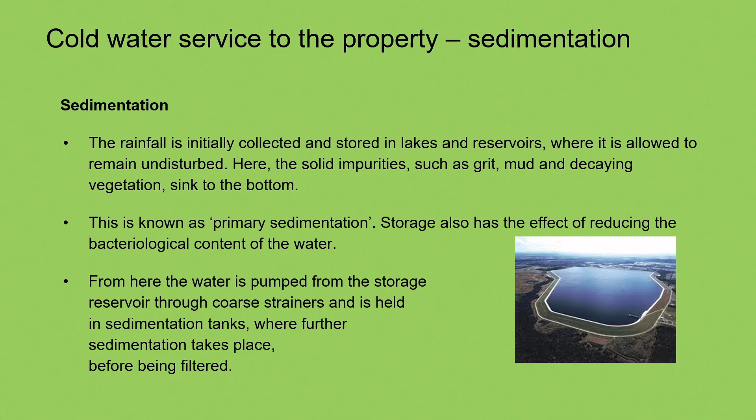Coagulation. Why is coagulation important in water treatment? So again, if you think you know the answer, put them in the comments below. If you're feeling shy though, write down on a bit of paper what you think that answer is. I warn you, it's quite a long one. Right, so why is coagulation important in water treatment?

So the answer would be coagulation does not guarantee safe drinking water, but it's still an essential part of the water treatment process. It removes suspended substances that make the water difficult to properly treat with a disinfectant and means that less chlorine can be added to disinfect the water. So it's making it safer basically.

So we try and get as much debris or sediment out of it as we can. So we use this treatment to get that out of the water, which means then we use less chlorine, which also means it doesn't cost as much to the water undertaker to treat.

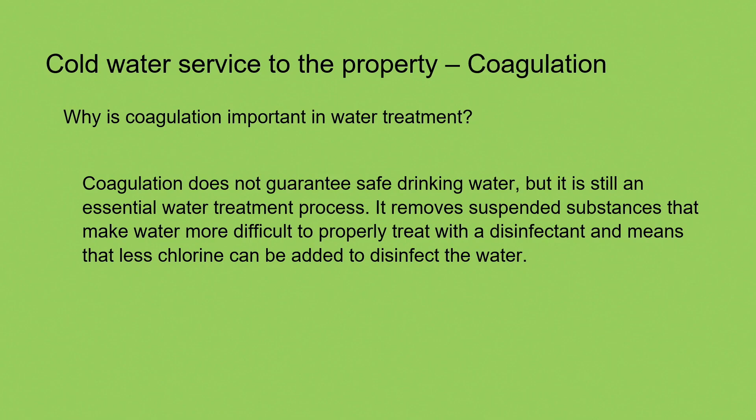Coagulation. Right, I'm going to apologise now. This could be some good words coming out here. I might not say them properly straight away, but I'll give it my best shot.

Right, so the coagulant liquid, let me get my little pointer here, is dropped into the water at the correct dosage. We've got all the impurities in that water, so the coagulant absorbs them impurities and it basically sticks them all together, which then makes them very heavy, which then, this is the word I've been looking for, flocs are made and formed and they settle down, so it's flocculation. This is a process that is called flocculation.

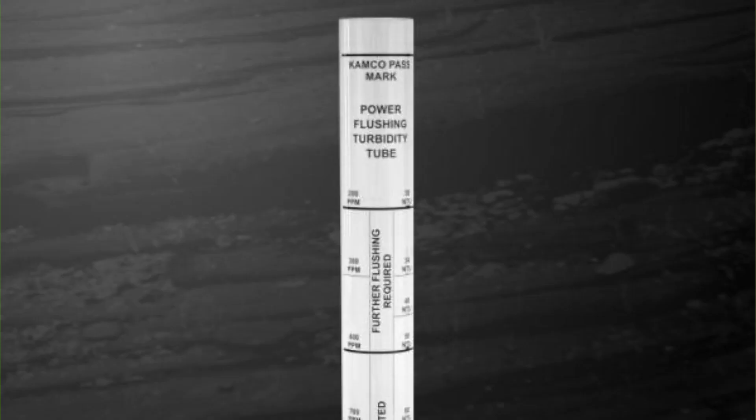Right, coagulation and flocculation are essential components of drinking water and wastewater treatment. They provide a reliable process for treating water turbidity. Turbidity just means that it's cloudy, hazy, there's bits in it, you can't see through it. You can get little tubes that you can test, and there's a little target at the bottom, and you look down the tube and you fill it up with water. If you can't see the target, you keep emptying water out until you see the target, and then it tells you how many parts per million of matter there is in that water.

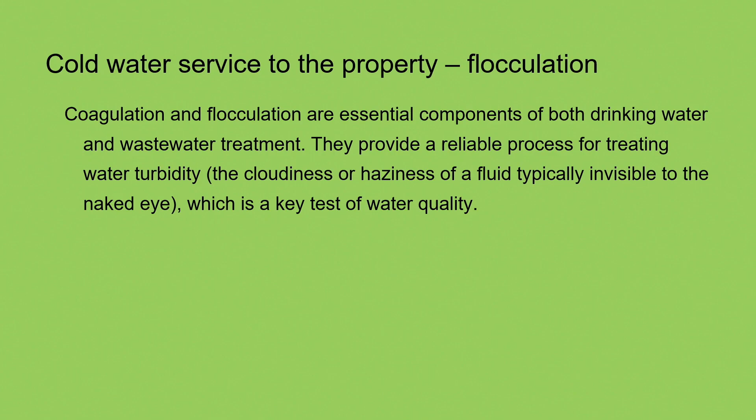So, turbidity, another key word to try and remember. This is a key test of water quality. All right, so we will look down this tube, we will see the water quality. If it is bad, we will use the coagulant treatment and help clean the water.

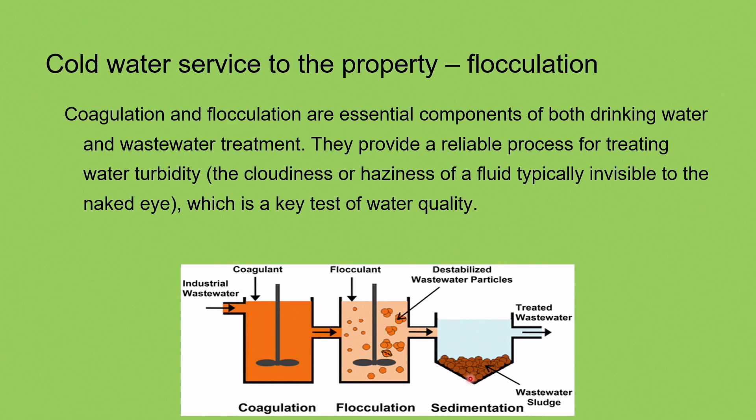Right, so how the water companies do it is they've got these little mixing blades here. The water comes in, it's mixed up with the coagulant, it flocculates in this next one, and it helps stick it together. And again, there's a little mixing blade there. Then it goes into a sediment tank, and all that sludge falls to the bottom, and then the treated water goes off to its next stage. They then pump or get rid of this by some form of pump or cleaning agents, so it doesn't just keep building up. A sediment tank.

So once it goes to this sediment tank, this is what the sediment tank looks like. Okay, so here is the sediment tank. You've got your inlet valve. This lets the water down into here to the bottom. We've got the floc falling down, so at the bottom you've got an extractor pipe, and it can go there. And it can be pumped and cleaned, but if there is any sludge that remains, we have what's known as a sludge blanket level. This sludge blanket basically levels it all out and stops any really big particles of floc coming up where it can cause problems.

And then you've got this sludge concentrator cone as well, so that all goes into there. I'm doing hand gestures, but you can't see it. But that'll all go into there, and again, it can be automatically removed and got rid of through that. And then the clean water comes up and then goes to the next channel and the next process. So again, I would say stop this video, draw that out, make sure you've got all the correct labels. It'll help you remember this at a later date.

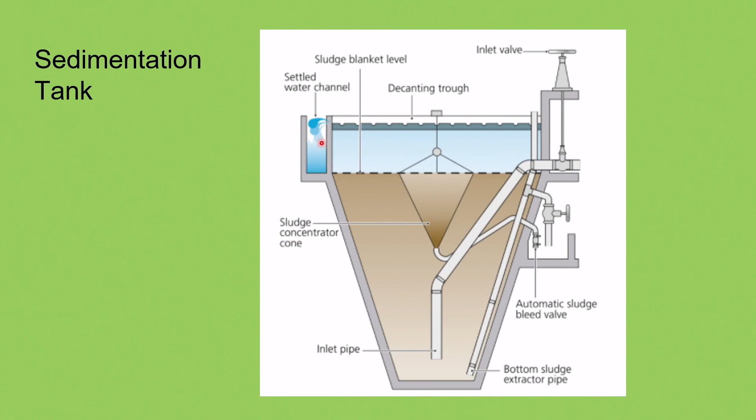Right, so now we're going to move on to filtration. Now filtration, my little pointer's in the way. Filtration can be done in several different ways. So I'm just going to go through a couple of them for now. So filtration, we have a slow sand filter. This is the most common filtration that most people use. Basically, water flows over the graded sand bed and it just goes through it.

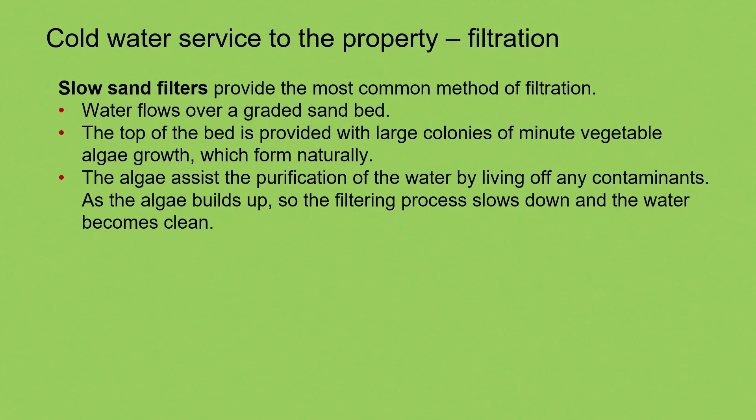Right, the top layer of the bed is provided with a large colony of bacteria and algae growing on top of it, which forms naturally. It's known as schmutzdecke. I'm sure I'm not saying it properly, but it's known as a schmutzdecke layer. And you're supposed to clean that off at least once a month or something like that. But it naturally builds up, okay? This algae assists in the purification of the water, okay? So it helps filter it. It basically builds up and it slowly eats any miniature bacteria, things like that, that it can get its hands on. So it's known as schmutzdecke.

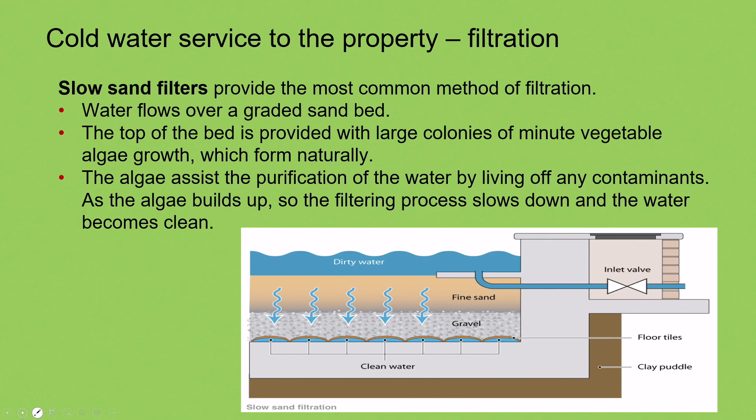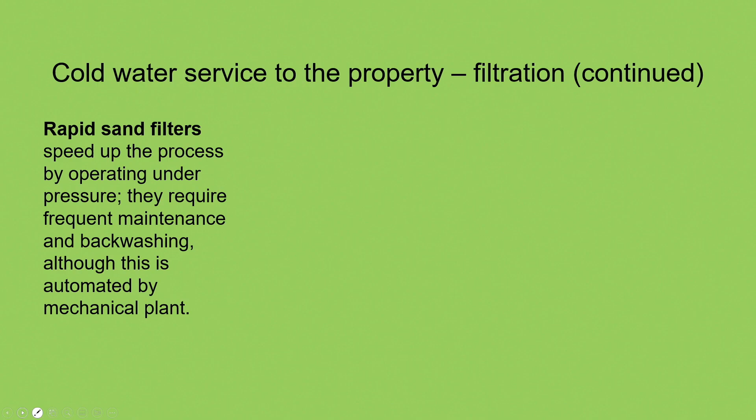So the next one is known as a rapid sand filter. This is the one most water undertakers use. It's a lot quicker process and it's done under pressure. It requires frequent maintenance, so it needs to be backwashed to make sure it's cleaned regularly. Usually they'll automatically do this. So this is what this system looks like.

So your dirty water comes through this side, it goes through that graded sand again, and then eventually it comes out the bottom, and the clean water, oh, there we go, goes through this way. So we have a compressed air line here. I'll explain that one in a minute. So that clean water goes off in that direction.

Now, how they backwash this is we would isolate the valve on D and open up the drain here, and we would pump air through into here, so it bubbles and aerates your sand and gravels, so all the debris gets cleaned out to the top, and then we keep doing that until the water is running clean again, and then they shut that one down, turn the air off, reopen that valve and carry on the process again. So for the backwash as well, we would turn off A and open B, and that would go down the drain.

Nice easy process, but again this is usually automated and it's done on a frequent basis, and they will have lots of these sand filter sets along the line. So whilst one's being cleaned, the other ones will be taking over the process. So that is a rapid sand filter. Again, I would recommend drawing these out, or finding them in your City and Guilds book that I told you to buy, and labelling the page so you know where they are.

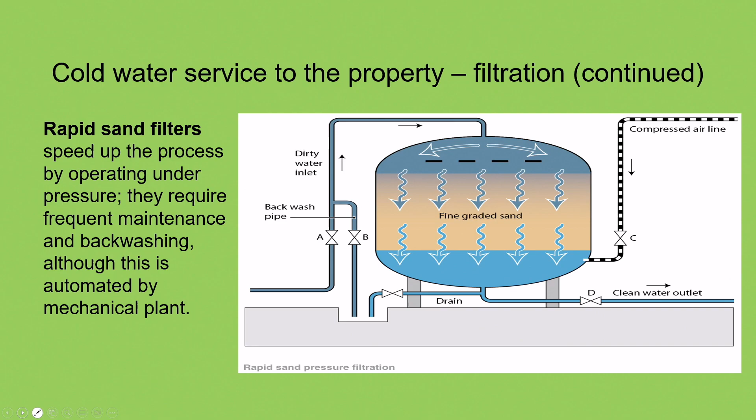Right, so the next stage of this, once it's gone through the filtrations, we can finally sterilise this water. Chlorine is the preferred method. You can use ozone, this is now becoming popular, but we tend to stick with the chlorine. So just to help kill off any bacteria that we've missed through the filters. Okay, we can use a UV light as well. That will do the same sort of process. But water companies tend to stick with the chlorine. That does sterilise the water and it's a more reliable method.

Again, they are normally done in this method here. It is usually automatically controlled because trying to get the dosing correct would be very hard work for us to do all the time. So it's usually done by a computer of some description, so it's automated. So we've got our water going into there. We've got our mixing control. That then gets diluted into this bit, and then it goes off to our mains, and it gets squirted off to wherever it needs to go through the mains to everybody's house. Sometimes the chlorine levels will be a bit higher, sometimes a bit lower. It just depends how close you are to the plant.

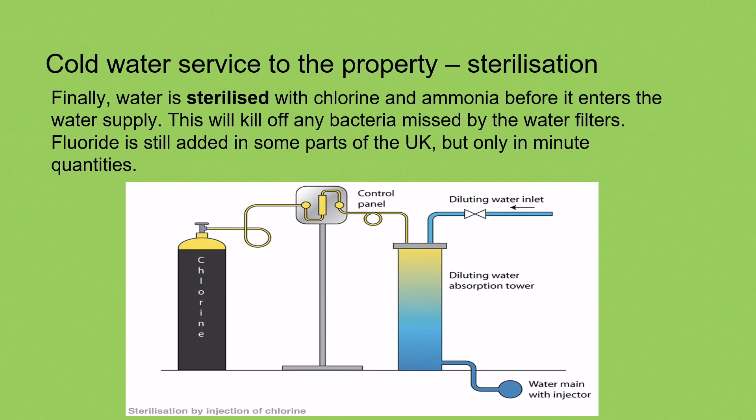So now the plant itself, once we've got all these stages in place, it kind of looks like this. So we go from our water source, our reservoirs, our rivers, wherever it wants to come from. It goes through the intake screen, so we try and take out as many of the bigger particles as we can. Then it goes to a low lift pump, which pumps it along. We put the coagulant in. It goes through our first mixing tank, flocculation tank here, which then spins it all round, mixes it up, helps that chemical bind all them particles that we don't want.

Then it goes into our sediment tank where all the bad stuff goes down here, so the dirty water is got rid of, and the cleaner water goes to the next stage, which would be our rapid sand filter or slow sand filter. So the mucky water again would go down here. Once it's gone through the filter, it then goes to the clear well, and then we go to the next stage where we have the disinfectant being put in. And then it goes to the high lift or the boost pump, which then sends that clean water off to wherever it needs to go, down the various distribution systems.

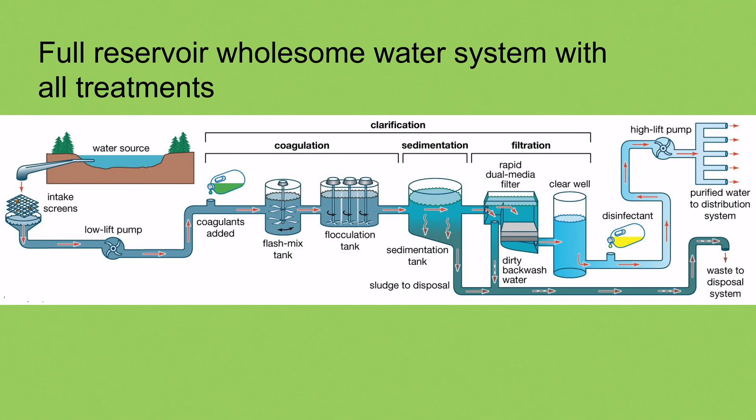So again, find that in the book if you can. If you can't, I would take a picture or draw this one out. It's totally up to you. So if you want to pause the video, do so now and make a copy. That is basically, I think, the end of this one. So I hope you found it useful.